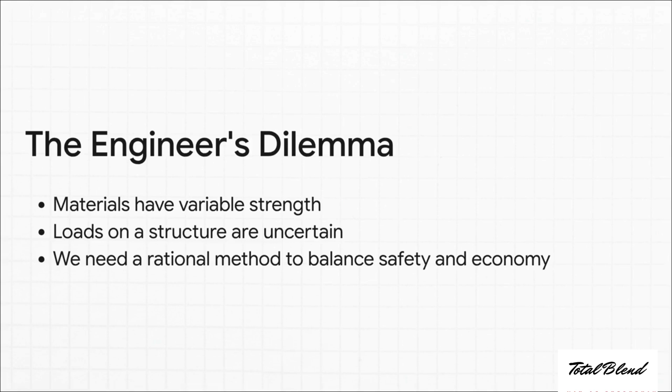You see, the whole challenge really boils down to one word: uncertainty. The concrete you pour on Monday isn't going to have the exact same strength as the batch you pour on Tuesday, and you can't possibly know exactly how many people will be in a building or how hard the wind will blow 50 years from now. So you need a system, a philosophy, to design for all of these unknowns.

So here's our game plan. First, we'll dig into that core problem. Then we'll walk through the three big design philosophies that evolved over time: the working stress method, the ultimate load method, and the modern limit state method. We'll put them head to head and wrap up with the big lesson. All right, let's get into it. This core problem of balancing safety, cost, and a whole lot of unpredictability.

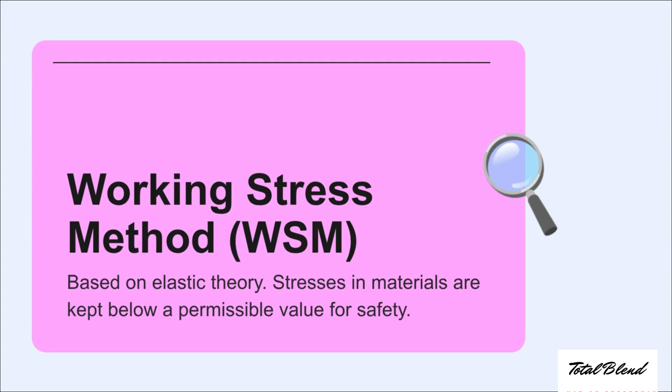So, the very first major attempt to solve this was a method that put safety above absolutely everything else, maybe a little too much so. It's called the working stress method, or WSM for short. The idea behind WSM was actually pretty straightforward. It assumes materials behave perfectly, like a perfect rubber band that always snaps back. To be extra safe, engineers would then apply a massive factor of safety. This made sure the real-world stresses a building felt would never, ever get close to the material's actual breaking point.

And this analogy just hits the nail on the head. It's like having this incredible supercar that can easily do 200, but you're only ever allowed to drive it at 30. Sure, you're safe, but you are wasting almost all of the car's potential. You're paying for all this power that you are literally forbidden from ever using.

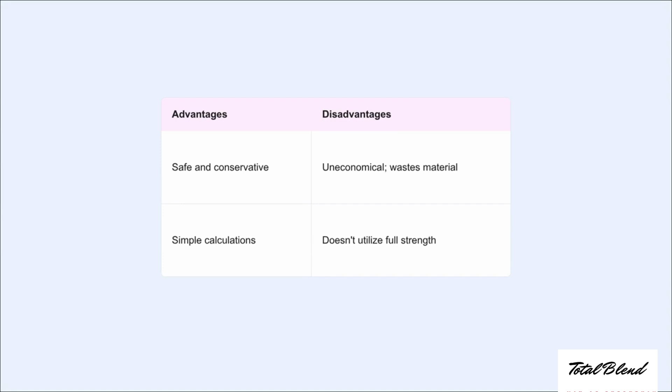So here's the bottom line on WSM. On one hand, yes, it was incredibly safe, and the math was pretty simple. But it was just hugely inefficient. It led to these overbuilt, bulky, and really expensive structures because you were just wasting so much of the material's strength. Plus, it kind of ignored real-world things, like how concrete can crack under load.

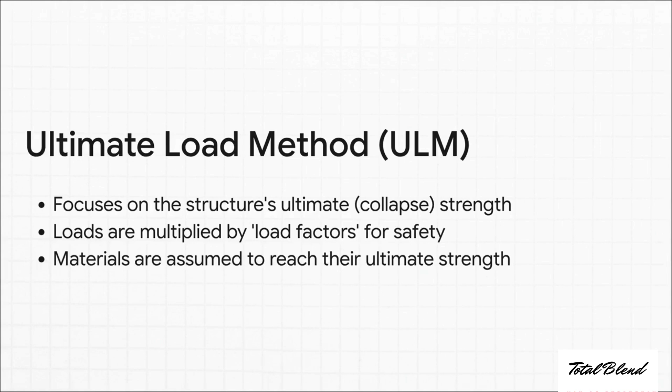So, naturally, engineers looked at this waste and thought, we can do better. This led to the next evolution, a direct response to WSM's inefficiency. It was called the ultimate load method, or ULM. Now, this method did a complete 180. Instead of keeping stresses super low, ULM focused only on the ultimate strength of the structure, like the absolute point where it would collapse. The safety part came from multiplying the expected loads by load factors, so you are designing the building to handle forces way bigger than it would ever likely face.

But this approach created a massive new blind spot. ULM only asks one question: will it fall down? It never asks, but is it actually usable? This chair analogy is perfect. Imagine a chair that's strong enough to hold a small car, but it's so wobbly and saggy that you can't even sit on it comfortably. Is it strong? Yes. Is it serviceable?

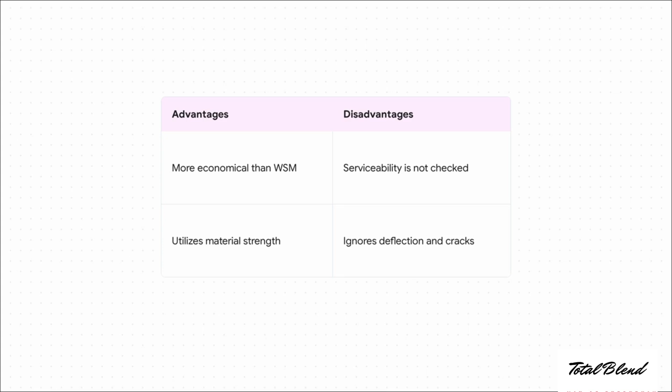Not at all. So yeah, ULM was a big step forward in making things more economical, but it completely overcorrected. It totally ignored the experience of the people using the building. A floor might be strong enough not to break, but it could sag or vibrate so much that it just feels unsafe, or develop big, ugly cracks over time.

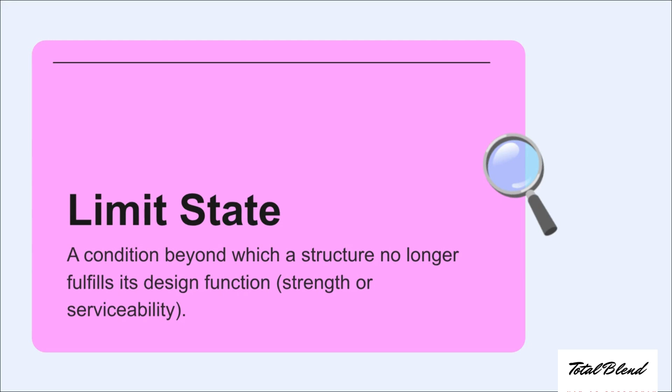Not good. And this whole journey brings us to the modern, really sophisticated solution that kind of takes the best of both worlds. It's called the limit state method, or LSM. LSM is built around this incredibly smart idea of a limit state. Now, a limit state isn't just about the building collapsing. No. It's any condition where the structure stops doing its job properly, whether that's breaking, bending too much, cracking, or even just vibrating in a way that makes people uncomfortable.

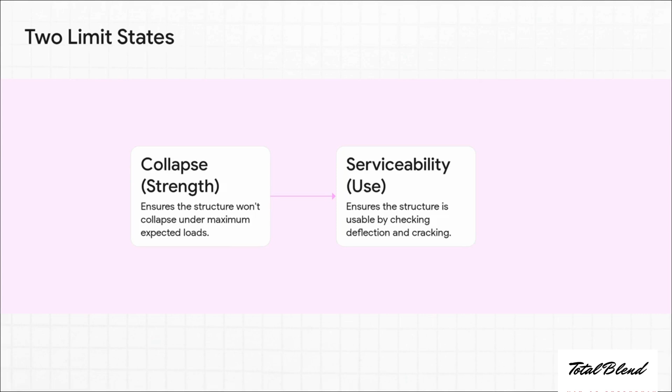And this is the real genius of the method. Every single design has to pass two completely different kinds of tests. First, the limit state of collapse. Basically, is it strong enough? And second, the limit state of serviceability. Is it comfortable? Is it durable? Is it actually fit to be used every day?

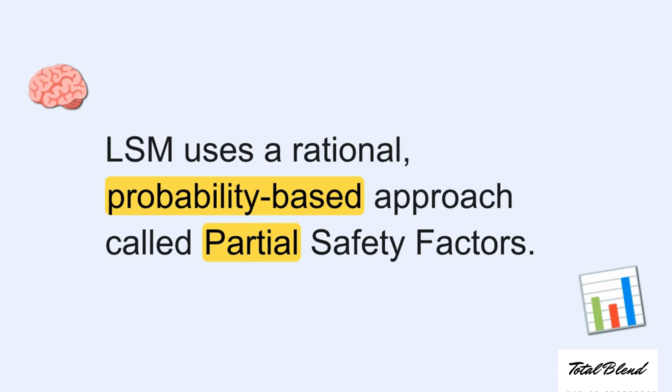So how does it pull off this balancing act? Well, instead of one big, blunt factor of safety like in the old days, LSM uses a much more nuanced approach. It's based on probability, and it's called partial safety factors. I mean, this is so clever. It recognizes that not all uncertainties are the same. Concrete is mixed on site, it's more variable, so it gets a higher safety factor of 1.5. Steel, on the other hand, is made in a factory under controlled conditions, it's more predictable, so its factor is a bit lower, 1.15. And the loads get factored up too. It's a tailored, really intelligent way to handle safety.

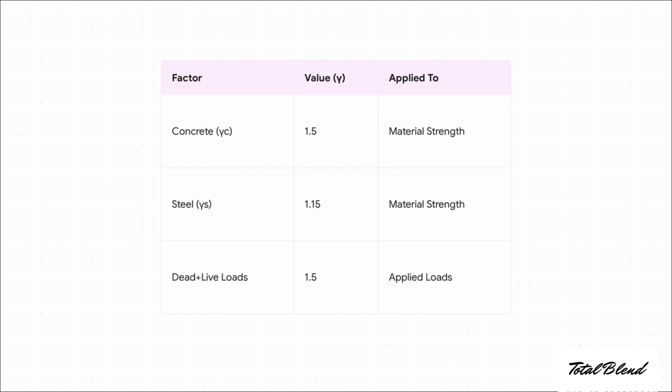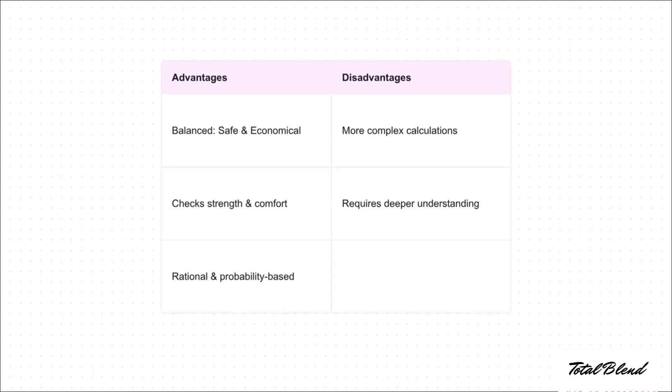The result is this incredibly rational method that finally finds that perfect balance. It's safe, it's economical, and it gives us buildings that are comfortable and built to last. The only real trade-off? The calculations are a little more complex, and it requires a deeper level of understanding from the engineer. A small price to pay, I'd say.

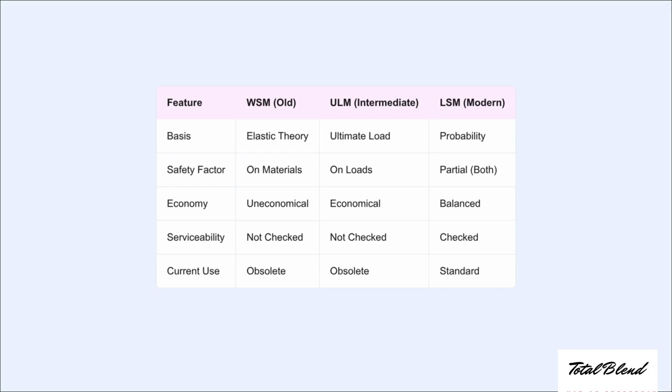Okay, let's put all three of these side by side. It's time for a direct comparison so you can really see how our thinking on this has evolved. I mean, this table just makes it crystal clear, doesn't it? WSM was wasteful. ULM ignored comfort. LSM gets it all right. It's based on probability, it uses those smart partial safety factors, it balances cost and safety, and it properly checks for serviceability. It's really no surprise that this is the standard pretty much everywhere today.

So after that whole journey through engineering history, what's the big lesson here? What's the ultimate takeaway? It's really this simple. The best design is a balanced one. WSM was way too cautious. ULM was too focused on just raw strength. LSM is the smart, sophisticated approach that finally achieves that perfect balance of safety, economy, and comfort. And that is exactly why modern building codes like IS 456 say you have to use it.

And that leaves us with one final thing to think about. LSM is the standard for today for sure, but it won't be the final chapter. As our materials get even smarter and our computers get even better at predicting loads, what do you think the next great leap in design philosophy will be? What comes after balance?